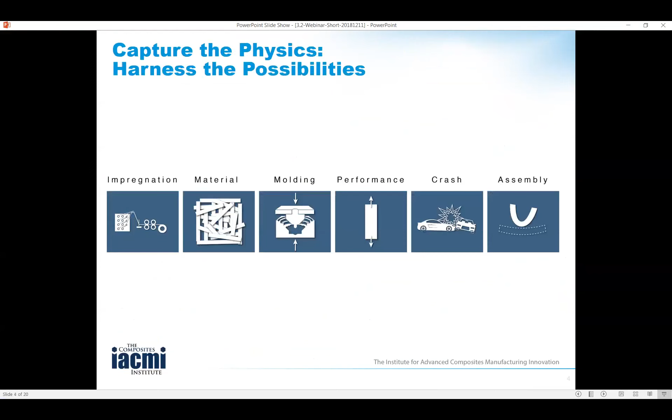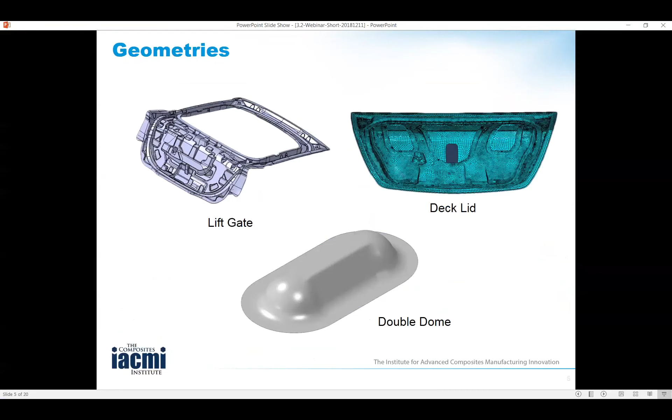For today, I need to introduce you to three geometries that have been of interest to this project with Ford and Dow. The first is a lift gate, the second a deck lid. Finally, this double dome shown on the bottom is a training or validation geometry that we used to prove out the technologies, which we've then applied to the deck lid and the lift gate.

In the interest of time, I'm going to focus today on the simulations and models to understand this novel material system and to understand the effects of the manufacturing or molding process. Suffice it to say, the output of the molding simulation becomes the input of the performance simulation to understand both the static and crash performance.

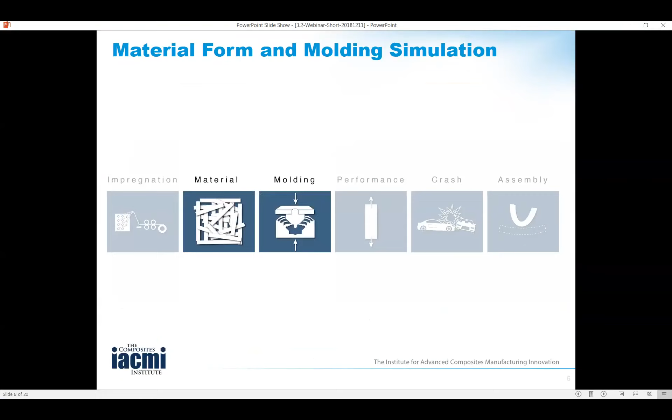of this material system, as well as models to understand the assembly when we do multi-material joining, putting together carbon fiber inners with fiberglass or aluminum outers to predict dimensional warpage, shape change, and so on. I won't cover those today, but we'll be happy to talk about those in further detail with those interested. So let's start by talking about this material system, which was developed by Dow as a unique pre-preg platelet molding compound.

The idea is you take, in this case, thermoplastic or thermoset pre-preg, slit it, and chop it into platelets of a given aspect ratio, and use that as a molding compound, somewhat like a sheet molding compound.

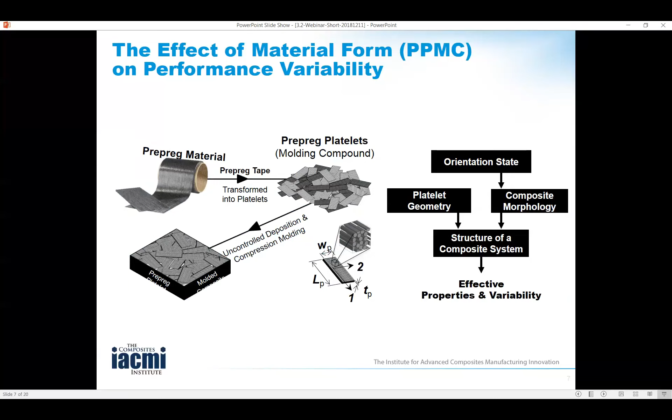Dow refers to it as a carbon fiber sheet molding compound that is used to form structural parts. There are two key descriptors we need to keep in mind when understanding this system.

The advantage of slitting and chopping this pre-preg is that you get a high degree of collimation of the fibers within a platelet, and you get a high fiber volume fraction.

Fiber volume fraction is key, as is the platelet aspect ratio, to understand the geometry of the platelet, as well as the platelet orientation. Those have critical measures on the performance of the as-manufactured part. The good news is that we have models to treat all of these: the fiber volume fraction, the aspect ratio, and the platelet orientation.

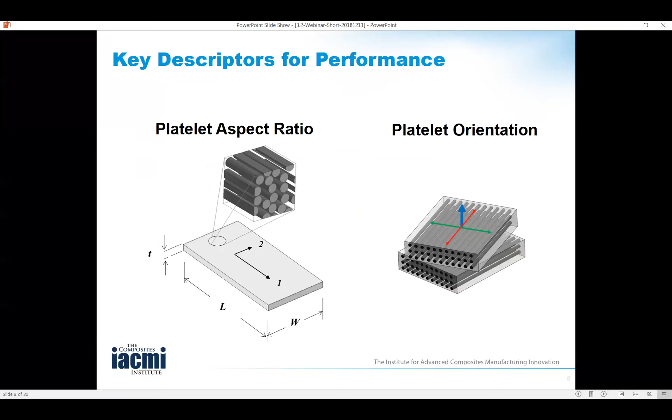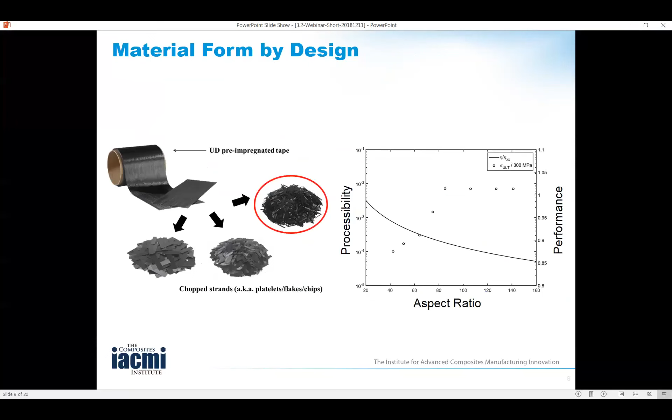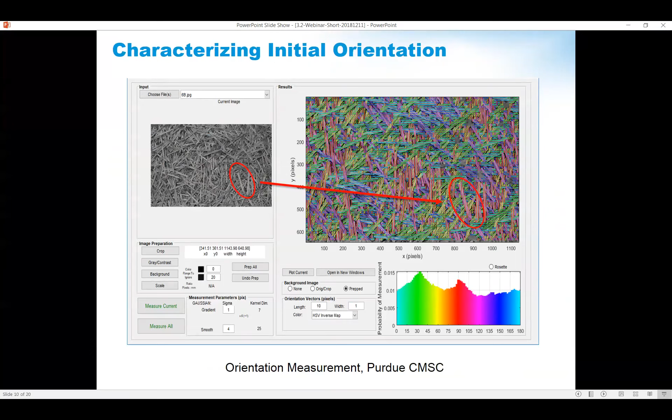The key is that we can now take this platelet charge, consisting of these platelets, take this orientation, and simulate the manufacture of a real part, understanding where those platelets flowed and realigned during that manufacture.

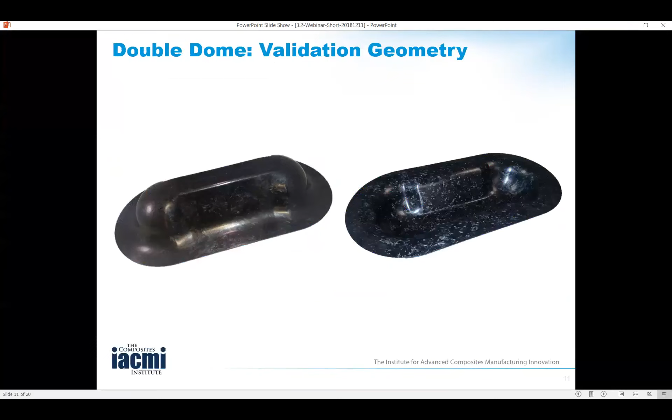We're going to look at this double dome part initially, and then I'll bring you back to a lift gate at the end. But we're going to do a lot of training on this double dome to understand the effects of flow.

So we start with that mat of the pre-preg platelet molding compound. We drape it over a mold, and then bring two-sided tooling together and flow the mat to form a part.

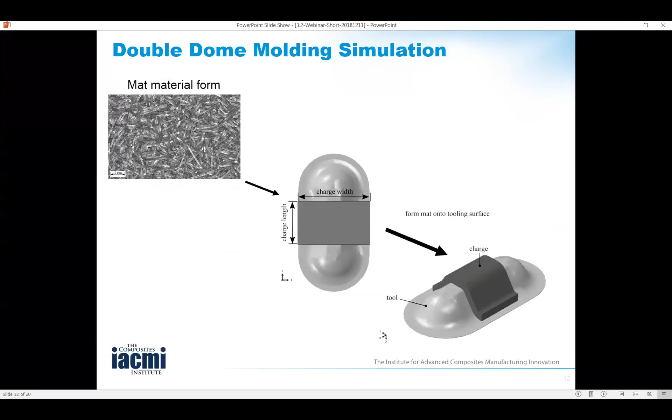In our simulations, we account for the effects of reorientation that occur as you take that charge and drape it onto the mold. Shown here is an initial charge, informed from the orientation state that we measured, and then the draping effects. Now I'm going to show you an animation of a simulation of the forming process.

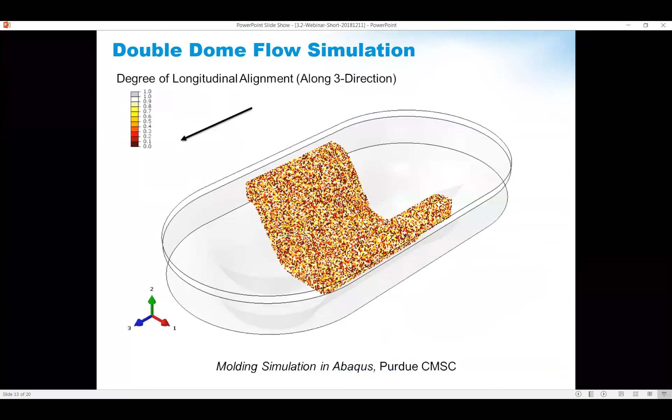You see the two molds coming together and the flow from that initial alignment all the way to a full part. This is a successful molding trial in the sense that the part completely filled, but you'll also note that there's formation of what looks like a knit line at those lateral and longitudinal extremities of the part.

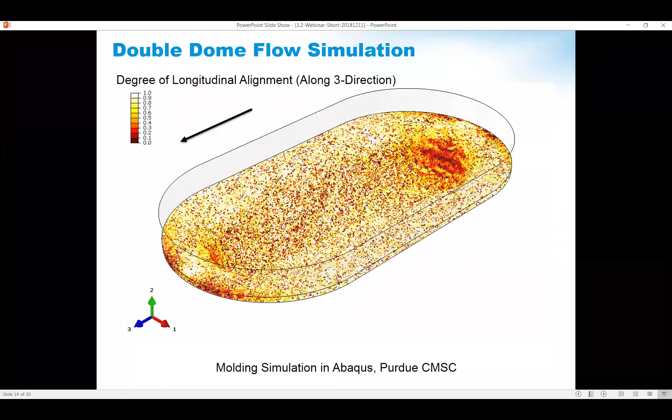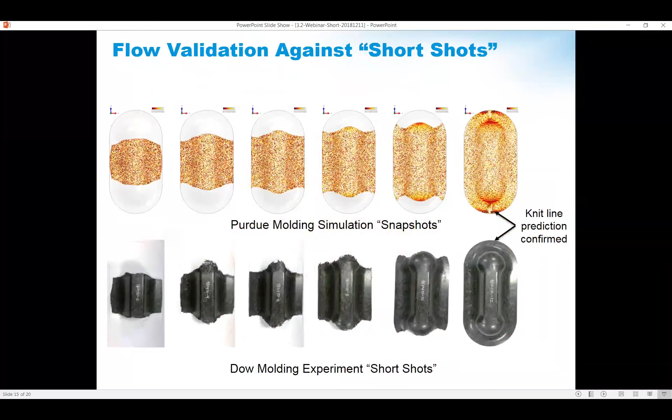This lends confidence to the simulation, but this isn't enough. Now we can start using the simulation to explore processing options. For example, we can engineer the final orientation in the part by engineering the charge placement.

Let me show you an example where we've initialized a transverse charge on the left and an axial charge on the right.

We're going to look at how those two charges flow to fill an entire part, and we're going to compare these two to gain some physical insight.

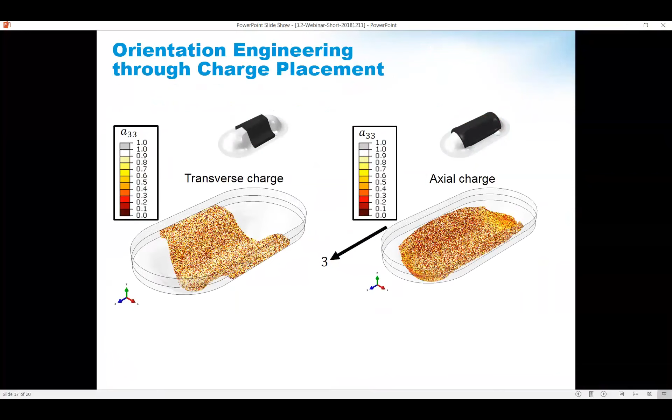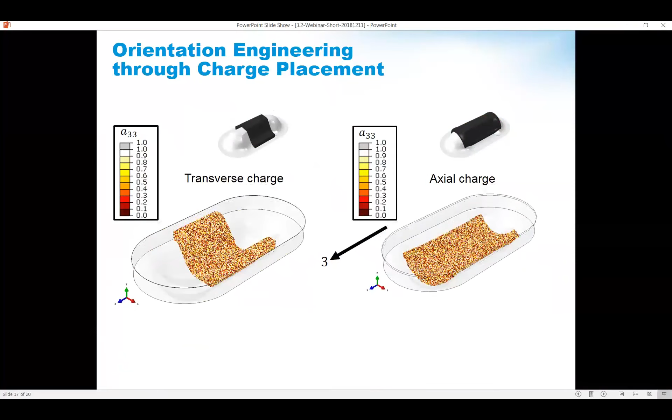Okay, so now we're running the simulation. We observe again complete fill, but because of the different flow paths or patterns taken from the two different charges, we actually result in different flow alignment or realignment of these platelets at the end of the process.

Now, that simple example illustrates the possibility of being able to engineer the final orientations in your part based on what you do with the charge, both the initial orientations within the charge, and then the shapes and placement of those charges. Of course, to carry out such a study experimentally would be a daunting task, but we can use these modeling and simulation tools to perform such virtual studies and optimize the final properties of the part based on this orientation.

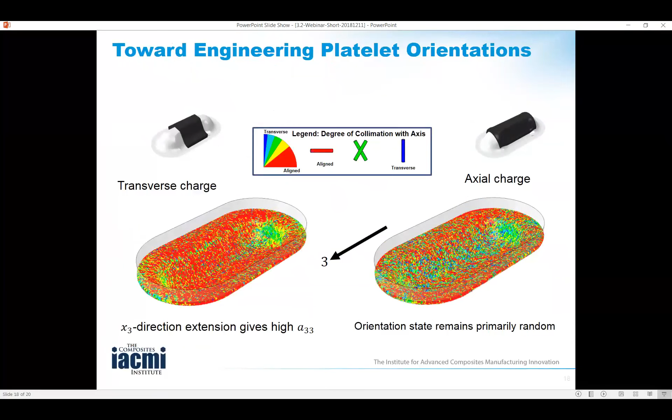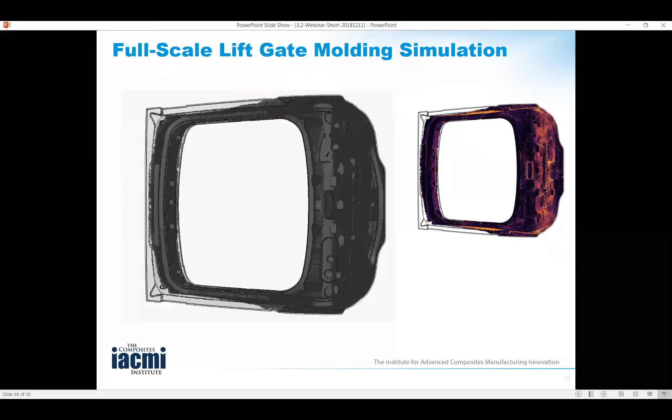With that, I'm going to bring you back to the beginning and point out that from here we could take the orientations coming out of the molding simulation, feed those into the performance simulation where we capture the interactions between platelets and predict the strength and stiffness of these parts, and have actually carried out studies where we look at designing virtual materials and predicting the performance variability among the materials with good agreement with experiment, and are extending this into crash applications together with the Ford team.

In the interest of time, I'll leave you with the message here, though: simulation really is the language of innovation across the automotive supply chain, where we've been able to connect all the way from impregnation through assembly, and have the various project partners across the industry and across the universities talking to each other by connecting into these simulations. With that, I'm going to turn the time to my partner, Dayakar Penumadu, who will talk about experimental observations and measurements of understanding this all-critical property of the platelet orientations. And then I believe we will take questions at the end of his presentation. Thank you for your attention.

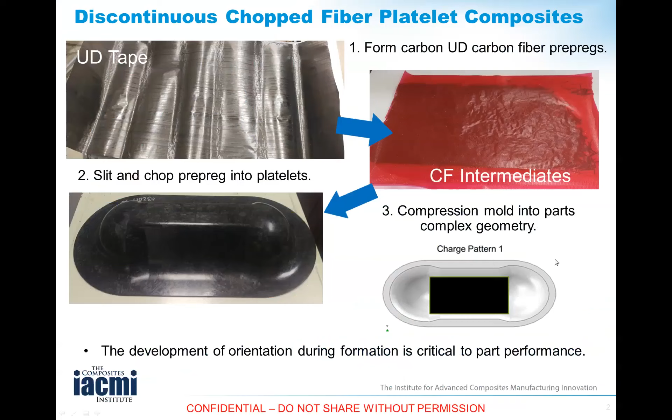The same problems we've been having over the decades with SMC still continue: what is the optimum charge, what should be the initial charge, orientation, where do you place it, how do you place it, how does it translate to part geometry, and what are the distortions after molding? All of those have to be accommodated, and thus simulations become the critical part of addressing those early on.

Subsequently anisotropy is not often considered in metals. Whereas the challenge with composites, whether continuous or discontinuous, is the orientation of the fiber at a given point controls everything, and it becomes even more critical for discontinuous systems. So the properties you generate on simplistic flat plaques will not translate to the real components that most of you are interested in.

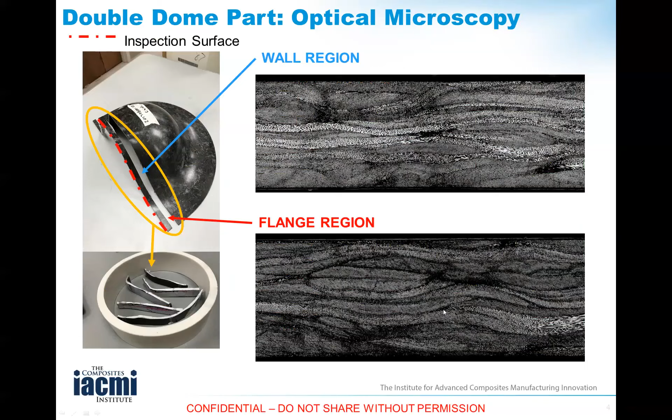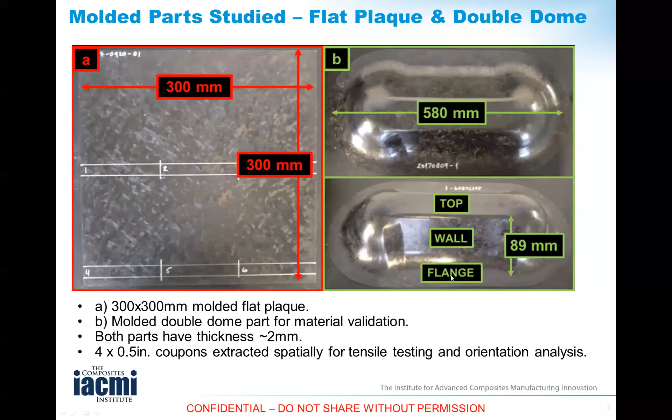I'm going to show you essentially three location, region-of-interest based computed microtomography data. These are three-dimensional visualizations of the platelet orientations. Going back to this double dome for a minute, we're going to see samples extracted from the top region, wall region, and the flange region to give you a sense of how the wall and flange vary compared to a flat plaque.

I'm going to run this video to show you these platelets, they all start off rectangular, as Johnathan mentioned in his simulations, but after molding there's a lot of three-dimensional curvature, both in plane and out of plane through the thickness. So one has to realistically capture this for predictive properties.

If I play that again, and you have to take my word for it because you're seeing this for a very short time, the orientations in this flat plaque are more or less random. It's hard to believe when you look at it, but that's how it turns out to be.

But if I play, on the other hand, the same microstructure for the wall, you can see fundamentally that there are certain zones of preferential orientation of these platelets depending on the flow of the charge pattern. Similarly, if I quickly show you the fiber orientation in 3 dimensions for the flange part, you could see that more or less there is a preferred orientation in the 45 degree.

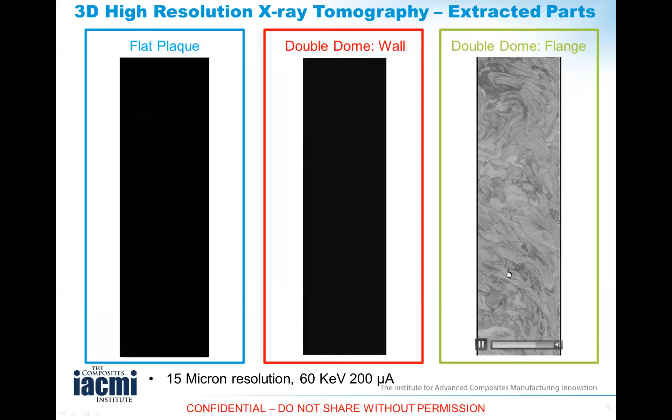So clearly we can see that there's fundamental differences in microstructure of these materials depending on where you extract them from a molded component versus a flat plaque.

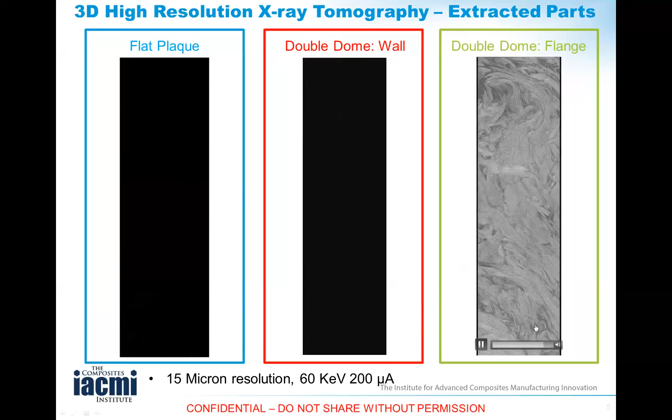The domes - just to give you a sense of the size here, this is a coupon sample tested in tensile testing. You're looking at a width of roughly 0.5 inch and a gauge section of about 4 inches. It's a lot of work to generate this data on X-ray computed tomography, but what we get out of it is a very detailed view of fiber orientation.

So we take that data and then use a technique called intensity gradient analysis, and fundamentally what that means is, as I'm showing you with my arrow, this is a bundle of carbon fiber or a platelet portion of the fiber in one of the planes.

If I look at the intensity of pixels represented in the fiber versus the matrix, they have a large contrast. So if I differentiate the intensity contrast, I'll have a large contrast in this direction as opposed to along the fiber. This is utilized now spatially in three dimensions.

In this case, we're showing results for a 0.7 by 0.7 by 0.1 millimeter voxel size. The reason we chose 0.1 millimeters is roughly the platelet thickness is usually between 50 to 200 microns, so this falls in the middle. The color pixels represent the orientation at a given plane, but now integrating the 3-dimensional effect through the thickness, which you cannot see just from the surface.

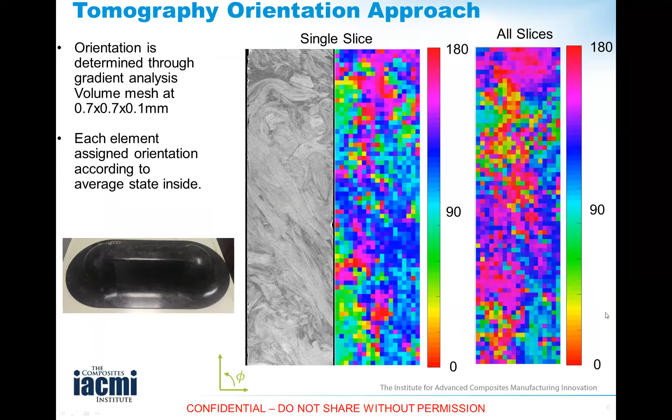If I were to play a real quick video, just to show you that now I can track the 3-dimensional orientation of these platelets through the thickness with this technique. So that's a kind of ground truth verification for platelet orientation using X-ray computed tomography.

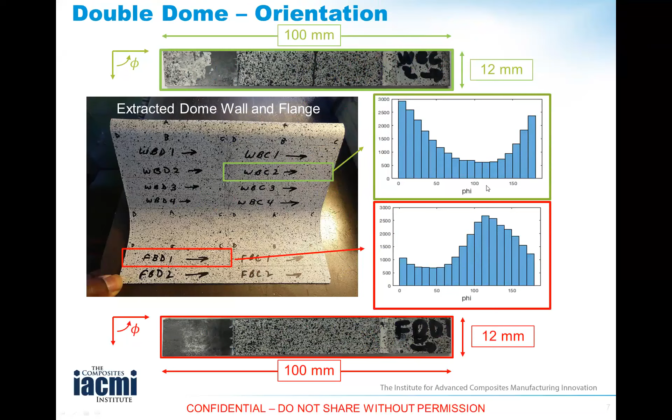This is an example that Matthew Kant is showing from his work, where if we take samples from a flange region versus the wall region, the orientation of these platelets is very different, and this essentially controls the mechanical properties. If you look at the orientations on the flat plaque, you see that the probability of a given orientation is very similar across all the angles.

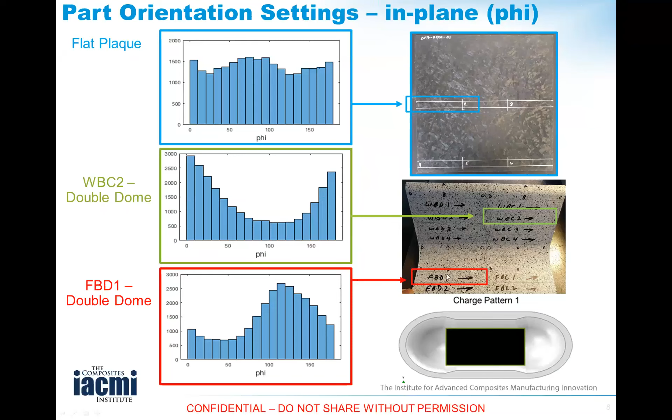This is the reason why if I take samples in X or Y or a certain angle, the properties will be very similar for flat plaques. But once you mold the components, you get this preferential orientation depending on where you are, and that would control your mechanical properties.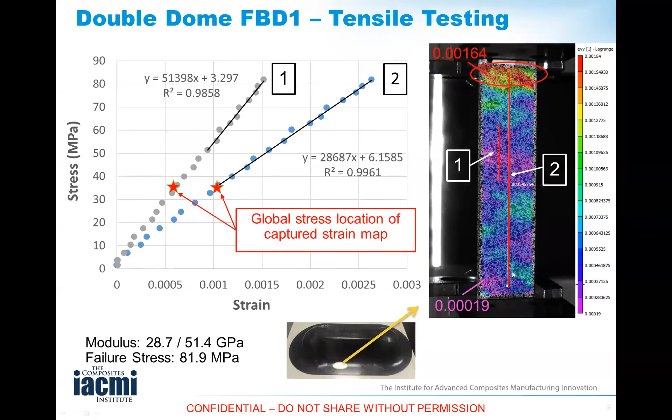So a lot of the traditional mechanical testing techniques are no longer valid. To interpret them correctly, one has to account for these local variations, largely resulting from fiber orientation and matrix-rich regions. Similarly, the same thing is happening at a different location.

So if I were to summarize at a high level how the mechanical properties vary: you can see here that in tension, my green curve is for material samples from the flange region versus this blue curve which represents the flat plaque. The strains to failure are large and the stiffness was highest for the flange, and lowest for the wall region where there is a lot of misorientation.

In the loading direction, you can also see that the fracture patterns show this. For example, the wall stress strain curve shows that the localization of failure is very sharp through the thickness and in plane, versus in a flat plaque, you have a lot of mobilization of failure planes that eventually coalesce to a failure surface.

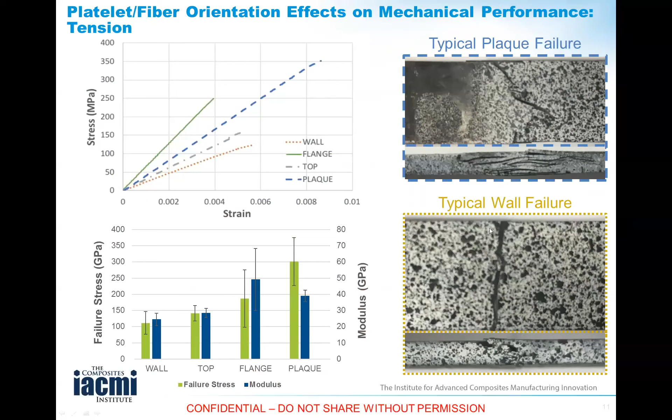This is an extremely important point. I think both the Purdue group and Tennessee group are trying to convey that for these types of systems, you really need to understand spatially the orientation of the platelets, fibers, and matrix-rich regions.

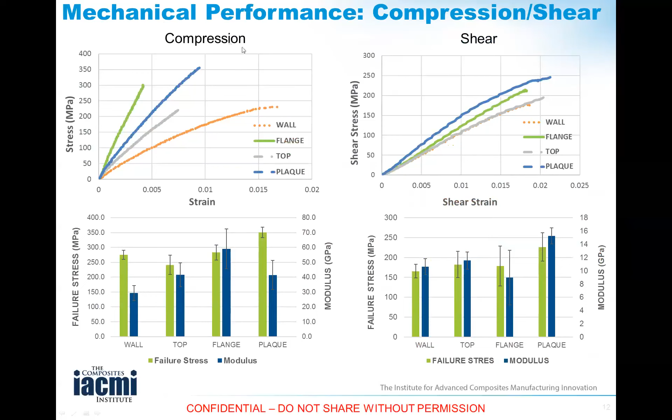This IP is being protected by our University of Tennessee Research Foundation, but I want to quickly introduce it to you. So here I'm showing you two plots that came out of the work of Isaac Daniel over the years.

Many of us know him from Northwestern University. He's actually about to retire next month, but I've drawn from some of his work here that shows this is a fabric that is a 5-harness weave.

If you look at a continuous composite and do mechanical property testing, the strength is extremely dependent on the fiber orientation. Same thing we have seen for platelets and discontinuous SMC-based systems. But one very important attribute we can gain from carbon fiber composites is that the thermal expansion coefficient of carbon fiber along the fiber direction is negative, so when you heat it, they actually contract, and along the matrix direction it is fairly large.

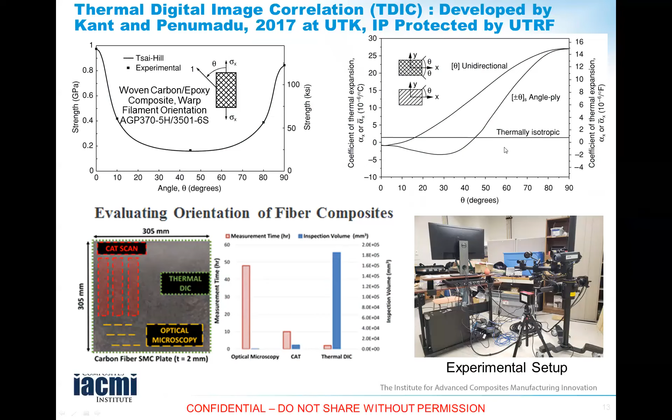We utilize this information in our thermal DIC system we have developed to derive spatially what the fiber orientation is. If you do computed microtomography, it takes a lot of time for small volumes to get precise measurements, and optical imaging is even worse. So we had to develop another technique that's meaningful to complement these two, and that's our thermal DIC. Our technique has two optical cameras and one thermal camera, and from this information and the anisotropy of the carbon fiber thermal expansion, we derive the orientation.

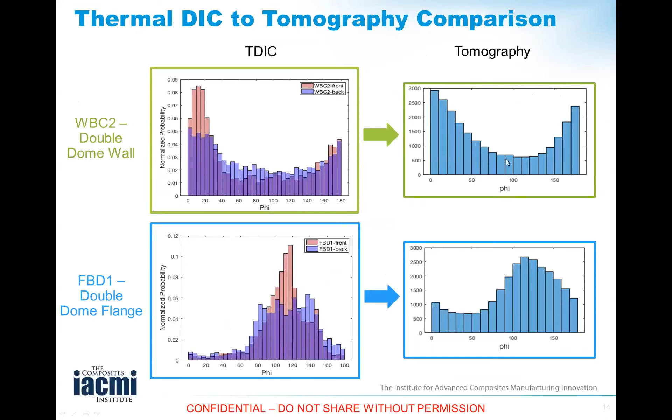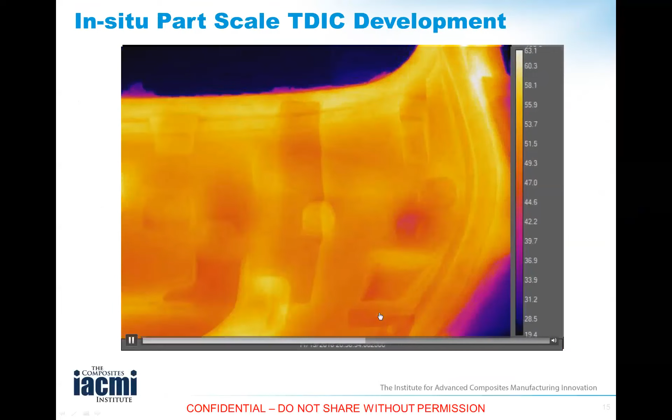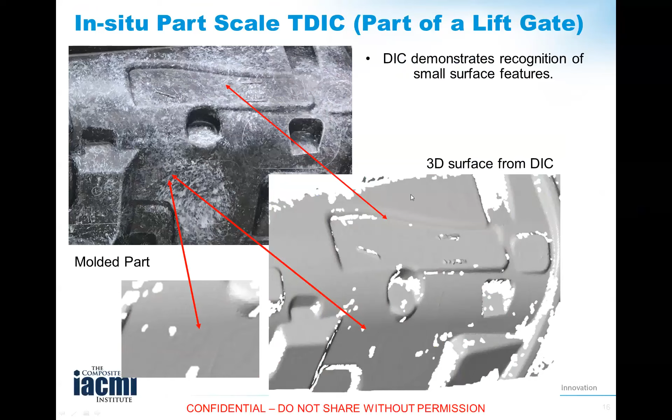This is a high-level comparison to show that our TDIC works quite well compared to tomography. This is an example of a molded component showing how temperatures vary as the part is cooling. We take this into account and couple that with the measurement of spatially resolved strain. Here is an example of what we could do at a full-scale part level. This work was done with collaborators at a scale-up facility in Detroit, Michigan, where we mobilized our TDIC equipment and technology and looked at a chopped carbon fiber material system being demolded. As it is being demolded, we obtain the fiber orientations and also the surface of the component, so we can also get geometric distortions.

In a high-level summary, we have a fairly important insight on how platelet and chopped fiber-based systems will work in compression molding and other manufacturing techniques. TDIC shows promise for extending our understanding of fiber orientation assessments, building on optical and X-ray microcomputed tomography systems. The most important lesson I want everyone to take away is that what the Purdue Group showed about the integration of manufacturing optimization work coupled with validation on a part scale shows a lot of promise for this type of ultra-fast molding application for automotive and other application spaces. Thank you.

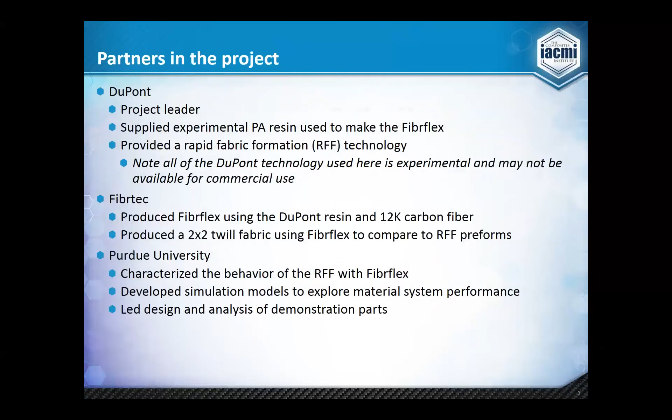Okay, what is a flexible towpreg? This slide maps out the way we develop the product. We start with structural fibers such as carbon fiber. It can be glass or aramids or anything to survive the melt process.

We can use virtually any thermoplastic resin, and this process is more or less an extrusion coating process. We developed some proprietary coating technology. The fiber is pulled through this device, coated with the resin, and we take it back up on spools to be used in further processes.

The tow, if you look here—pointer, getting highlighter—if you look on the outside of the tow, the resin is impregnating basically just the outer portions of the tow, the outer 1/3, if you will. The inner 1/3 is unimpregnated. For example, a typical carbon fiber polyamide tow would be approximately 0.2 inches wide, about 8 thousandths thick. The inner 2 to 3 thousandths is substantially unimpregnated.

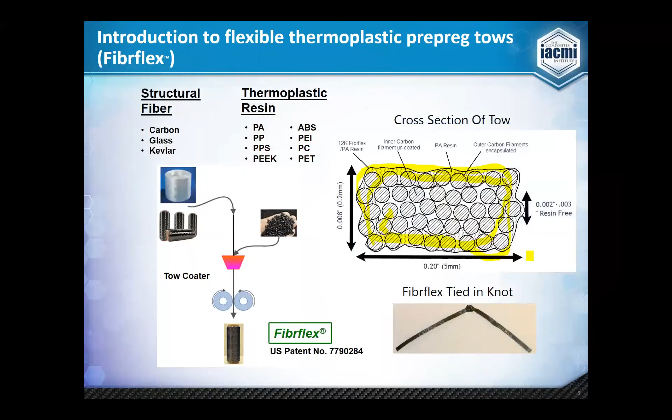Now, this slide depicts the differences between a flexible tow and a rigid tape. The tow can be tied in a knot and doesn't break, which someone in the textile processes recognizes as a way of testing yarns for weaving or braiding technologies. Tapes, obviously, if you try to do that, snap and break. The tows are put up on spools, similar to what the tapes are.

But in the downstream processes, our tows can be put into preforms that are very flexible. You can see in the lower left corner a fabric which is a 1100 Tex fiberglass with a nylon 6 resin. It is very conformable, compared to organo sheets or other rigid structures.

So the bottom line is the Fibrflex enables solutions that work. You can make complex and imaginative parts with this, and designers do not have to force their design to fit the material.

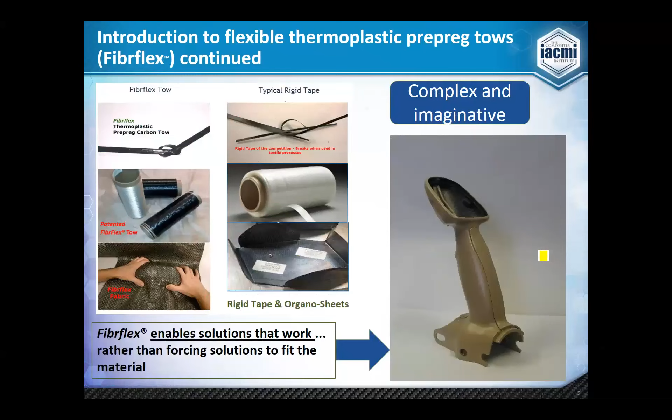Okay, now preforming, and this is really where the rubber meets the road. How can you use these materials to solve real world problems? With this material, it can go from inventory, not knowing what its final resting place is going to be. It can become a fabric, it can become a braid, it can be used in tow placement.

In fact, in the center you see some preforms developed with tailor fiber placement. The lower photograph shows a piece of Fibrflex fabric where we've tailor fiber placed tows directly on the fabric. This could be used for developing ribs or other reinforcement structures in the tool.

The material can also be used in pultrusion, it could be used in filament winding—virtually any process that's available in the composites industry can be applied to this material.

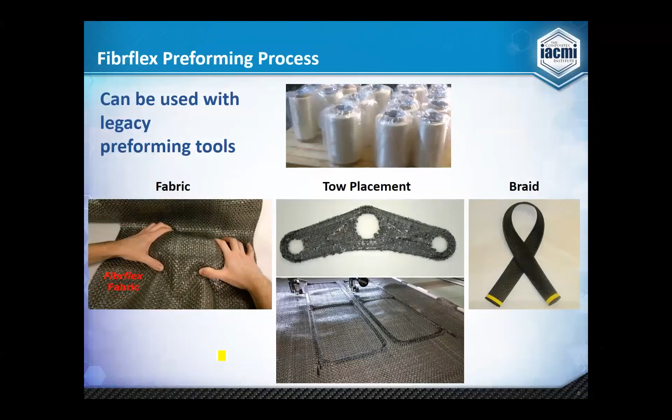Well, that was the end of my horn tooting. A friend of mine, Paul Pendorf, many of you know, says if you don't toot your own horn, no one's going to know you. Now we're going to talk about the project here.

This is a slide that shows how we develop the rapid fabric formation, RFF for simpler terms. If you look at the upper left-hand corner, there's a slide that shows tows running into, we'll call it, the zero direction. Each one of those colored strands represents a tow, and they're laid down at a specific spacing—in this case, that's 1/4 of what we call the unit cell.

The opposite direction fiber, the 90s in this case, are placed on top of that with a similar spacing. Then you come back with an offset and place the tows in the opposite direction, and so on and so forth, until you get a completed cell structure, as you can see on the right-hand side, which is what we call a 4x4 tow cell. You can also see little black dots.

Those are where the tows are thermally bonded, or point bonded, to maintain the integrity of the preform. Now you can see on the lower left-hand corner, that's a fabric, an RFF fabric made with our Fibrflex tow. One of the beauties of this technology is that you can make near-net shaped products rather than fabrics, which conserves material considerably. That's what we're showing in this slide here.

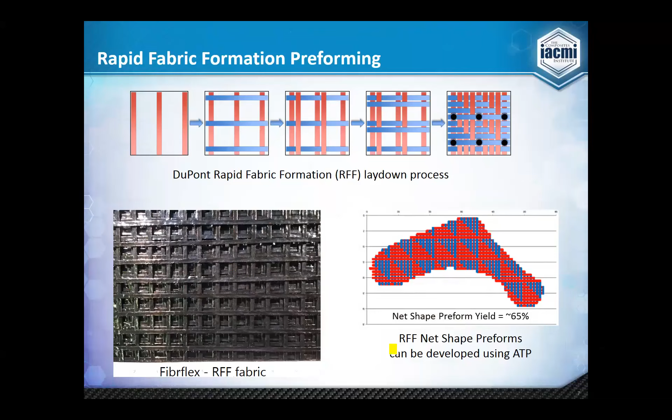Now, what are we going to do with these things? This next slide points out a couple of parts we made. I had a tool that we developed a number of years ago to demonstrate a composite, carbon fiber enclosure, an electronic or computer enclosure for the military. It was being built in production using machined aluminum, and they wanted to compare the weight and strength of carbon fiber to the machined aluminum part. This is an IRD program. What was beautiful about this part is you can see there are very steep walls in this tool, because we were competing against a machined aluminum part which was virtually 90 degrees. We did make these with roughly, I think, around 2 degrees of draft.

But it also has many other very interesting contours. At the top, you can see on the left side is a 2x2 twill fabric preform. There are 3 plies there, and those 3 plies make a 45 thousandths wall. On the right, we have the RFF preform. So they're both placed on the male portion of the tool. The female portion was laid on top of that, manually pre-compressed. We placed that in an oven, brought the tool to the melting point of the resin, transferred it to a compression press, applied pressure to close the tool, cooled the part, and at the bottom you can see the results. The fiber completely wet out. These things rang like a bell, so they're very well consolidated. We were quite pleased with it.

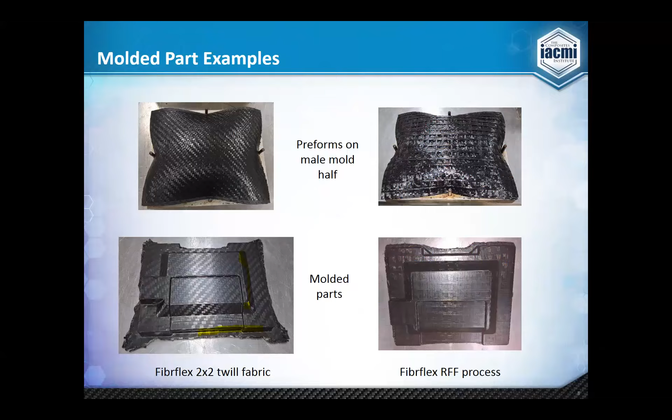Great, let me take over here. Hopefully this goes somewhat seamlessly. While this is loading up, let me just say it's been really great working on this project with Fibrtec and with DuPont. Bob, he's able to toot his own horn, but I'll do that for him as well. He's been a really great project partner, bringing a lot of experience on how the coated tow itself works, but also the molding processes we're looking at, and comparisons between the new products we're developing in this project and how they fit within the realm of things already in existence. And DuPont as well, bringing the RFF technology and experience with polyamide resins, being able to say, okay, here's what we can produce.

But one of the questions we have on this project is, as we get new material forms, as we get new ways to make a composite material, how do we design a part for that? How do we make sure we start off on the right foot with that design so that we're confident in a part we can make with that technology that'll actually meet the needs of the project we have? So can you all see the presentation? Is that loaded up now?

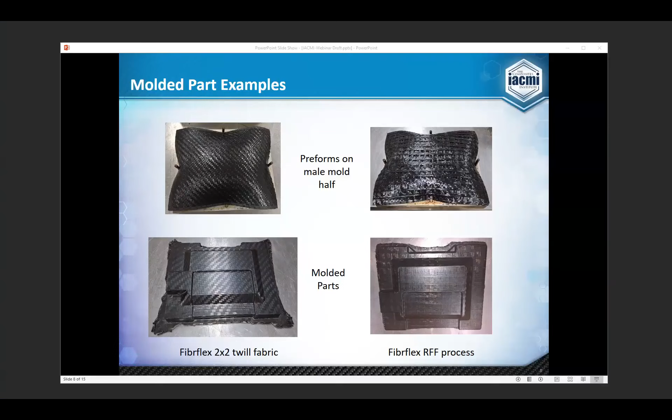You cannot see my presentation yet. Now we see it. Now you see it?

Okay, great, perfect. So one of the questions we have is, how do we design a part using a material system that we don't have a lot of experience with yet? That's where, as Johnathan introduced this concept of manufacturing informed performance, we can use that to our advantage with a new material system. So if we start with something like the MNT enclosure that Bob was just showing, we have a design, we start with the CAD model, and we want to know how do we go through our manufacturing process and how do we get to performance on that.

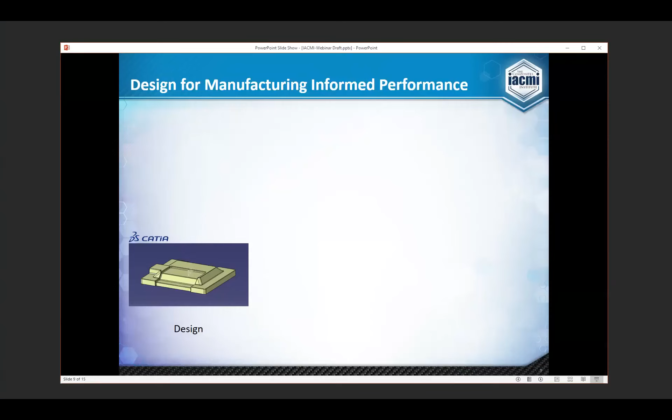So one thing we want to do is model the forming process. Orientation state, as we've talked about before, is really critical in these parts, but also the shearing behavior, how it introduces wrinkling, how it shows those different effects, and how that's going to be different for the RFF fabric, since we don't have the interweaving of the tows as you would have in a twill fabric. It's going to have a different shearing behavior that we want to understand.

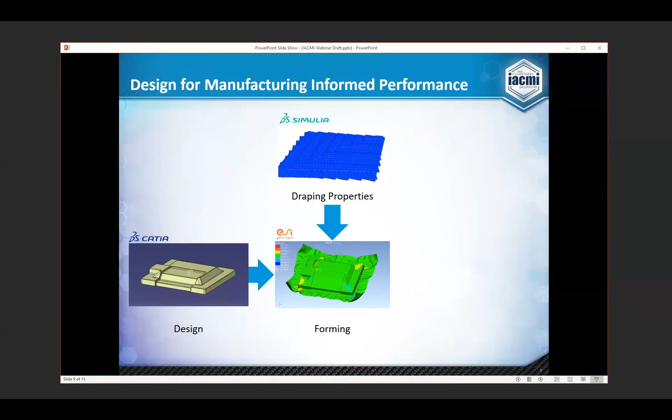One thing we can do with that is develop a computational model that gives us an understanding: if we go from the coated tows to a fabric, what are the draping properties of that system going to be? We have a model to predict that behavior, and then we want to bring this to performance. If we have some loading cases, if we have a maximum strength we need to hit, how can we be confident our first prototypes will be as close to our target results as possible?

That's where a mechanical model comes in, showing the interaction between adjacent tows and how that information gives us our homogenized behavior from this composite that has the resin, the fibers, and the complex mesostructure of the RFF. How do we use all that information to give us a better design?

Going from design to performance using the manufacturing process, we get a better understanding of how the process affects our final parts, and we can explore the design space more rapidly. What do we do if we change our fiber volume fraction? How can we change the bond locations in our RFF to get different draping properties that give us better performance at the end of the day?

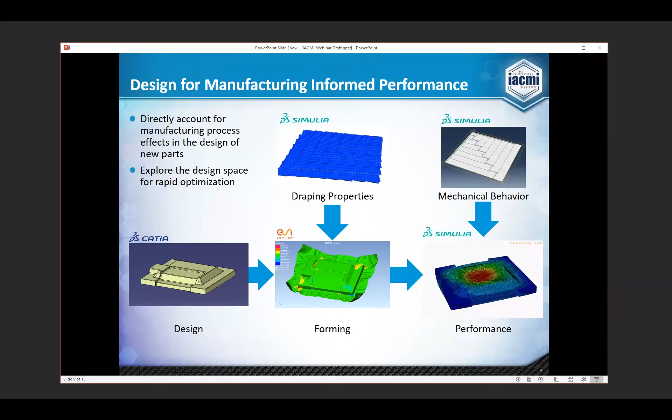How can we bring all those things into a computational study to give us a leg up in the prototyping process? Here I'll show how we tie the experiments we're doing in with the simulation. We've been responsible for characterizing the material, both in the unconsolidated state before draping and in the consolidated state.

Bob talked about how the coated tows have a resin-rich area on the outside and a dry area in the middle. How is that going to affect our draping behavior? How does that affect the flexibility? We can go down to that level of modeling to show how an individual tow bends.

We can also tie that in with characterization using standard fabric measurement techniques that look at bending and flexural behavior, building up our model of the flexible fabric and comparing it with picture frame tests on a limited number of cases to validate our simulation. If our simulation matches the physical system's behavior for a couple of cases, we have confidence it will match our interpolated cases as well.

Then we build that flexibility and draping behavior into a forming simulation, and we compare those forming simulations with the molding trials themselves, looking at predicted shearing angles at the corner of this extent. Do we see that play out in the molding trials? How can we use that for design?

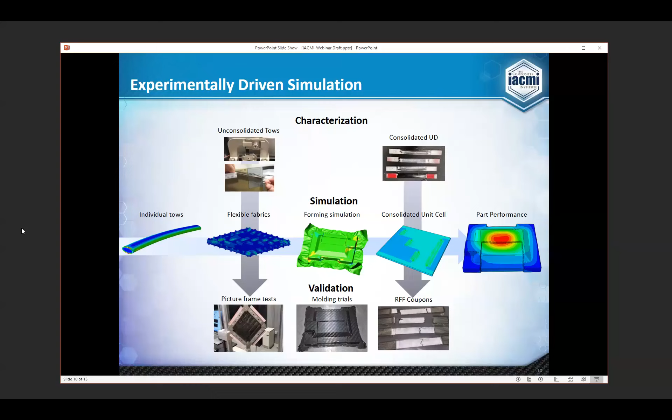I just want to spend a couple minutes looking through a little more detail on a couple of those steps along the way. One thing we're looking at from the unconsolidated RFF material is how do we understand the drapability of this system? For fabrics, typically one measure we use for drapability and formability is a picture frame test.

We put the fabric into the frame, and then we pull it, and we see what force is required to give us a certain shearing angle of that material.

Because we don't have the interlocking behavior in the RFF, we don't see that same increase. There is some increase because of realignment of the tows for the force required to continue shearing it, but we don't see a really drastic kind of behavior around a 25-degree mark. So what this means is when we move to our forming, we can accommodate much higher deformations, much more complex geometries in our part, and the computational models show that.

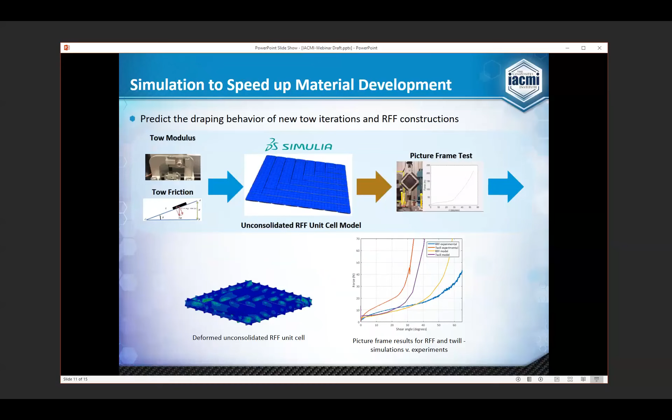We're able to go from our measurements for the modulus of the tow, the friction between tows and between a tow and a molding surface, and use that to model how our material behaves, and use that for when we want to change fiber volume fractions, change sizes of our tows, if we want to go from a 12K tow to a higher count, those types of things we can explore computationally.

And then the next step is, okay, we have this model. We know that as we go through forming, we're going to have different shearing angles, different orientation states. How is that going to affect our mechanical properties? So that's where we can use a micromechanical model to develop the unit cell that describes how the RFF is going to behave, and use that to predict our consolidated properties as they are locally to each point in our performance model.

One other thing we can point out is because in the RFF system we don't actually weave the tows, we can start off with different crossover angles of our tows. So our warp and weft don't have to be orthogonal to each other anymore. We can have the warp and weft angled at 45 degrees to one another, at 60 degrees, and we can optimize that initial crossover angle to get better part performance from that. That's something we can explore with the model as well.

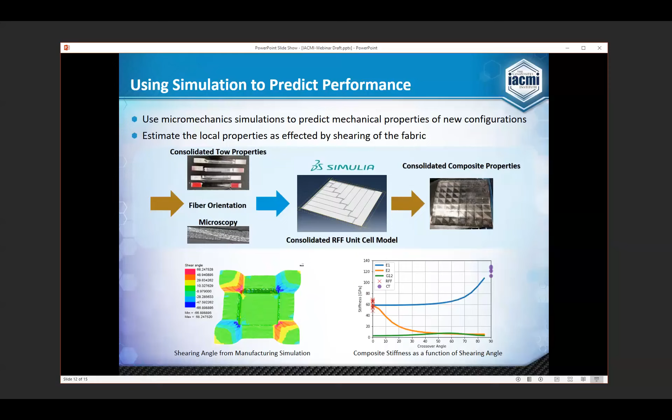And then also shows, to Bob's point, that we're getting very good wet out as we go through the compression process because, as he pointed out, there's not a lot of distance you have to travel to get the resin to fully impregnate inside the coated tow. So we're showing good results from that as well.

And then the last piece is how do we validate our molding trials? So for our molding simulations, we can go through the trial that we just did with this M&T enclosure and take some images of that molded part, then use an image processing technique to pull those flat surface images off of our as-molded part and compare with the fiber orientations we would expect from our simulations. That work is ongoing right now to validate our fiber orientations, because that closes the loop on our process.

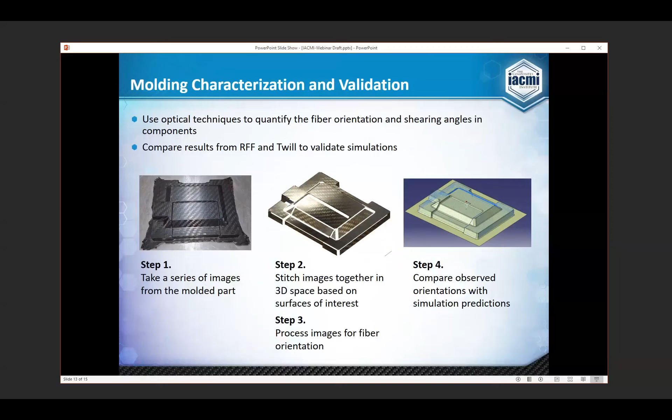Because if we can understand how the material is going to form, and then understand how the formed material is going to behave mechanically, then if we know which angles our fibers are at, we have a very high confidence that we're going to be able to predict part performance and use that to drive design, to optimize to the correct fiber orientation, to zero in on the right fiber volume fraction that gives us the right performance characteristics of our part, really having a leg up in our initial prototype for a good first trial.

And I just want to make a note that this is part of an overarching framework we're developing at Purdue that I've been leading the effort on lately, the Composites Virtual Factory.

So we've talked about the Composites Virtual Factory Hub before. That's our integrated simulation platform that gives us the ability to take all the different simulation tools required to understand manufacturing and form performance on a variety of manufacturing processes. We take tools provided by a number of our IACMI partner software vendors, ESI and Dassault Systèmes were two of the major ones we used on this project, and use those to create integrated workflows for the different processes. Additive manufacturing, injection overmolding or hybrid molding, high pressure RTM, and compression molding are four processes we've identified as critical to development of high rate processing for mostly automotive applications, though they have wide ranging uses as well. So creating an integrated workflow that uses all this information helps drive the design process and gives a better end use for our industrial partners.

The work we're presenting right now is actually phase 2 of a project we've been doing with Fibrtec and DuPont. The full recap of phase 1 is available on the IACMI website. We've put together a report for phase 1 that you can go see more information about, covering the coated tows, the RFF, and the simulation process that ties all that together. With that, I'll turn it back over to the headquarters folks, and I guess we can take questions if there are any.